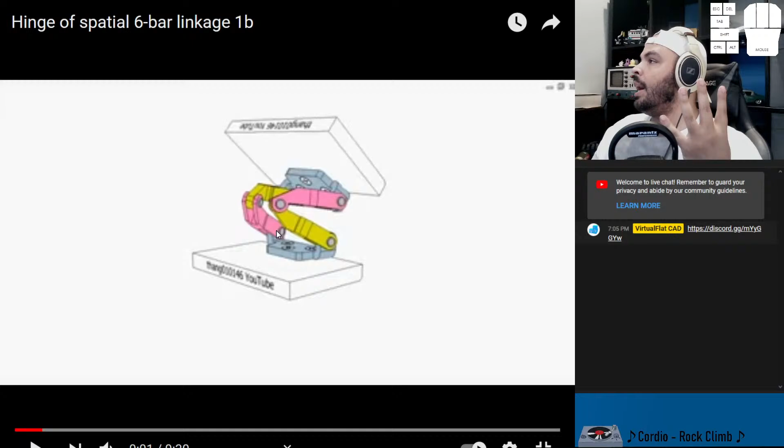Well, you have to consider a link as any connection between 2 hinges, right? So the ground links count. So from the end of the pink to the end of the yellow, that's 5. And then the same on the other side. The end of the pink to the end of the yellow, that's 6. I don't have 6 fingers, but there you go, 6. So it's a 6-link mechanism.

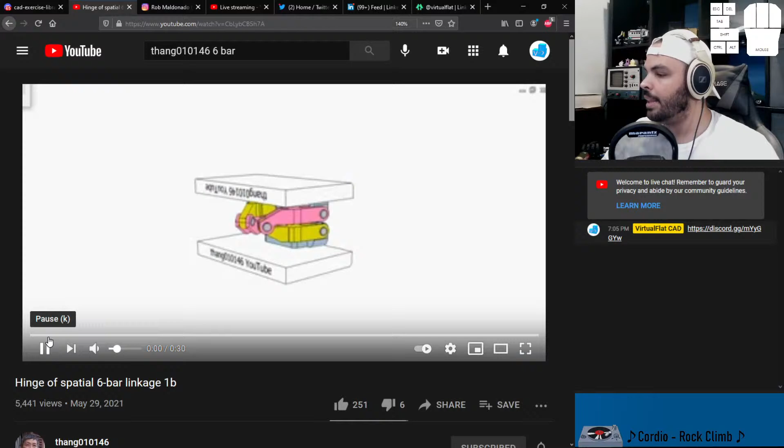And it's just like a hinge. But instead of being a simple hinge, something like this is very useful because it provides extra clearance when going through its rotation. So you could see something like this where you need the door of something to be flush when it's closed, but when it opens, it needs to get out of the way of the stuff around it. So something like a car hood. I'm not saying that a car hood uses this exact same one, but yeah, I think it's gonna be very fun.

So let's analyze this a little bit, shall we? So looking a little closer here, I have these brackets. They appear to be trapezoidal shape, and they have their hinges at diverging angles like that, with the angles going away or outside from the actual hinge portion of it. So I can produce one of those.

Additionally, it would seem that the difference between the yellow and the pink is that the pink has 2 female connections. You see that? 2 female connections. The yellow has a male and a female. So that's what allows the bracket to have both male connections, but a male needs to go with a female in the center there for it to actually work. So that's how that works out. There's also some pins, but those are arbitrary. I could put them in, I could not.

And Melektrika just showed up, which is amazing. Always awesome to see her here. She tends to pop in my streams every now and again, and I appreciate when she does that. But yeah, it's pretty good to be here and be streaming for you. It'll be good, and I really can't wait to start working on the improvements and stuff like that. But like I said, I need to figure out some stuff based on what I've learned.

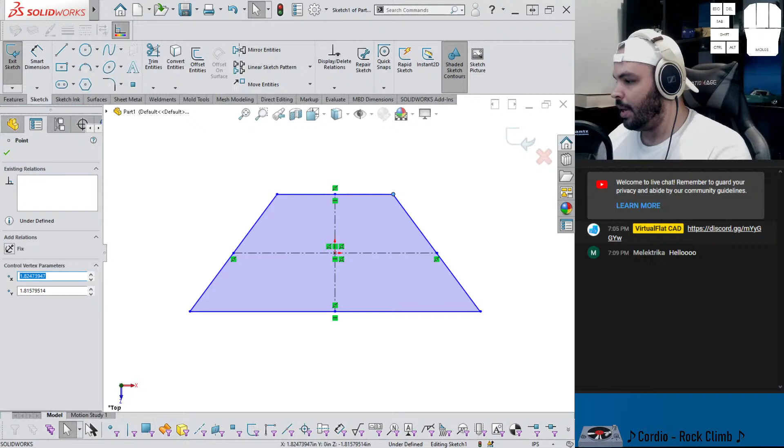So let me get one of these. This is a center rectangle, but if I delete the verticals - yeah, there we go. That's a quick trapezoid shape, just in case you want to do that. And yeah, let me do it like this.

Okay, so the overall width of this thing, let's make that 2. The average length, maybe 4. And maybe an angle would be most appropriate here, say like 30 degrees. And just out of curiosity, we can get some driven dimensions - there we go. So it's about 5 and a little less than 3. But yeah, that looks pretty good.

We're gonna go for our sheet metal base flange, and on the video it looks kind of thick. Yeah, that's like plate at that point. It might be better to just machine a shape like that, but if you wanted it to look like it, maybe you can set it to steel and go for like 3 gauge. That's exactly what I was thinking. It's heading towards the downward direction, so maybe I'll reverse direction for the thickness, so that the top plane is where it will sit on, and I think that's pretty good.

To get the corners, I could say corner trim. I want this to be fillets, and maybe 1/2 inch like that. There you go. You might be looking at this and thinking you could have just extruded that, but with an extrusion, you can't do this. Ooh, check that out.

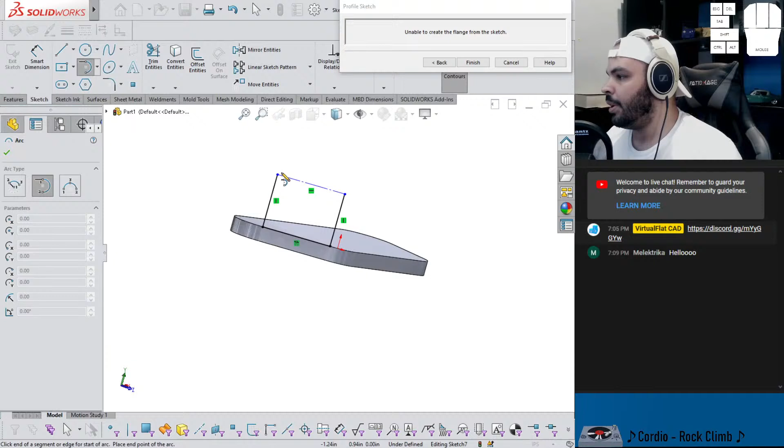So what I'm gonna do at this point, let's do edit flange profile. I'm gonna turn that into construction and get a tangent arc, and I should be able to bridge this to that. Just out of curiosity, what radius does that give us? It's kind of a weird one, so let me rip that off. And I'd like the midpoint of this to match up with the midpoint of this - make coincident - and then I can turn this into a more normal value that is centered about that edge there. There you go, and we can say 0.5.

And let me make the bend towards the outside, so I'll say finish. Oops. Let's do something like that. I think that's what he's got going on there, right? So let's tab over and take a look. Yeah, it's directly towards the outside, it would seem.

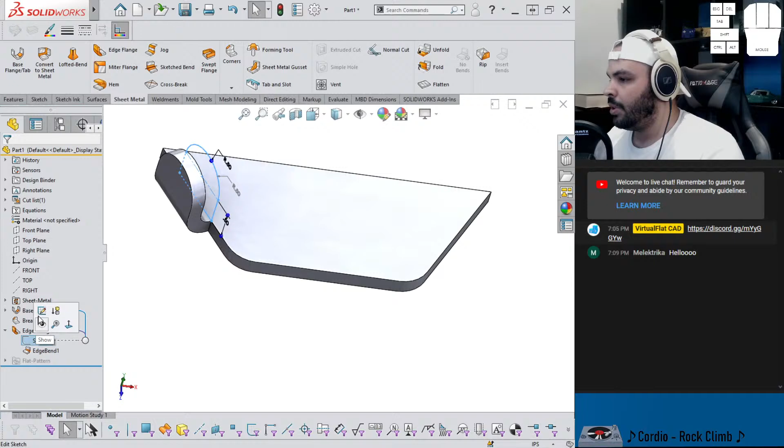I do notice that the flange is right towards the edge, so maybe what I'll do... yeah, the preview display of these look weird. I wonder if that's a bug or something. But let's say I just want the 2 edges - this and this. And then let's adjust the sketch here, which you can do just like this - just remove the midpoint relation and say that this will hang out there. Okay, that does seem to work out pretty well.

Oh, I forgot about simple hole - that's something that never gets used. Let's go for hole wizard instead. Let's go positions. Something like that, maybe, and let's go for like 3/8 or something - 0.375 - like that. And then I can say that it is mirrored about that plane.

And that's basically the bracket. So let's go into here - bracket.

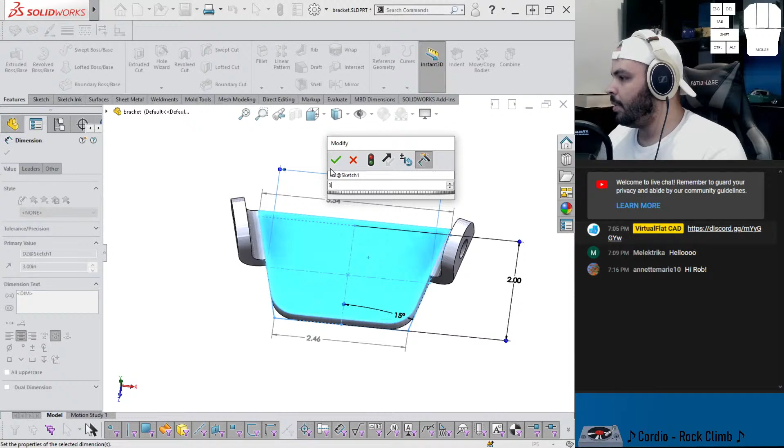Hey, Annette just showed up - I'm glad to have you here. And at the very same time, Workshop 1668 - hi all, he says. Hey, I saw your work on Instagram, dude, that's some slick welding skills you got.

So, let me do an assembly. Oh.

New assembly. Let's put this down just like that. And I know we'll need a copy of this. And it needs to be opposed. So eventually, when we start putting this together, we'll have something like that.

Let's look at the picture again. So funnily enough, let me see here. Is there any handedness to this? Yeah, between the two parts, the pink and the yellow, it does appear to be handed.

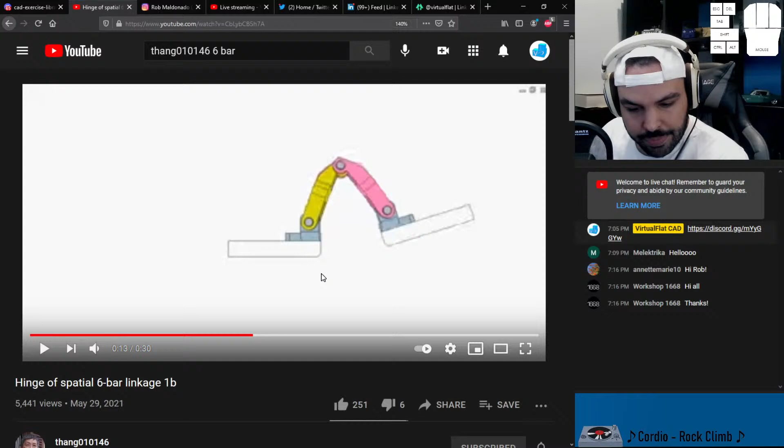So I think the way we can do this, let me see if we can get a better view of it maybe later on. So that's it in profile there. That's pretty good. And how about from over here? So it does tend inward.

So what I'm thinking of doing, let's draw it as seen from the viewer being on the right hand, looking towards the left. You'd look straight onto this, and I would expect to see a shape like that. Like there'd be a crook in it.

And based off of that, we can put more details, because that's just to fill it. You've got to take out all the details in your mind and just start with the basics. So it's just a crook with either a cutout or a tab based on whether it's male or female. That's really all it is.

So all right, let's try something here. What's the thickness of this again? This is 3 gauge thickness.

Don't know if I'm messing myself up in that regard. Well, if anything, I could do a top-down assembly feature. So let's do a part, maybe on the top plane.

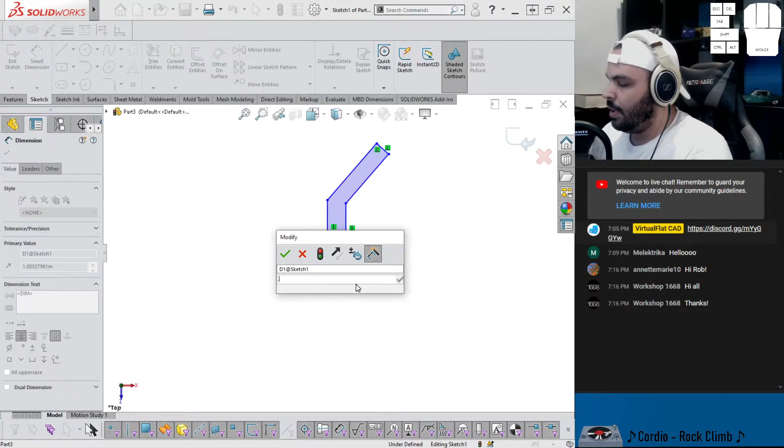I think fundamentally the shape is just kind of like that. So let's make this 1/2 inch. Maybe make those in line with each other like that. It's not hooked to the origin properly, so let's do something like that.

And now let's define the angle here. So let's do 180 minus 15, which is the same angle we had from the other one. I think that'll be very relevant. And I guess overall length, honestly, maybe from that midpoint down.

Think what would help us if we did something like that, made these equal. And then I'll maybe increase this to 3. We're probably going to have to play around with the design a little bit. Link.

Yeah, this could take on a thickness. Maybe like 1 - that might be too much. 0.75. Okay.

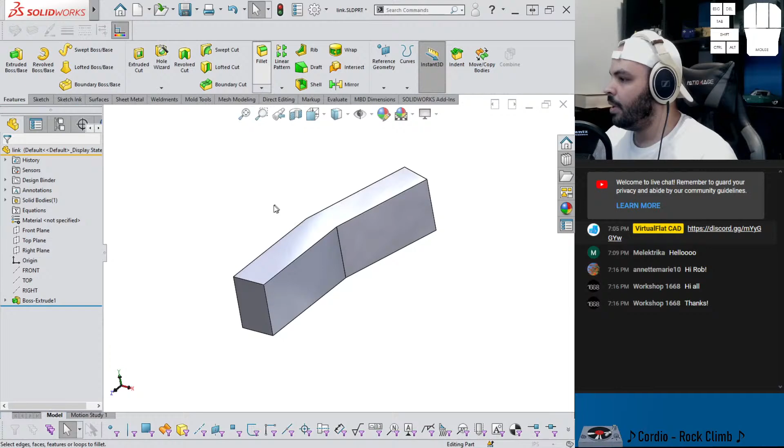Let's do some full round fillets here because we know this is eventually going to be a hinge, and rinse and repeat on the other side. So we got something that looks like this now.

Let's do another sketch. So this is the both female version, which looks like what this is tending to. Let's go to a rectangle, select midpoint, and get it centered about just like that. And this has to be the 3 gauge thickness, but I'm going to put 1/4 of an inch like that.

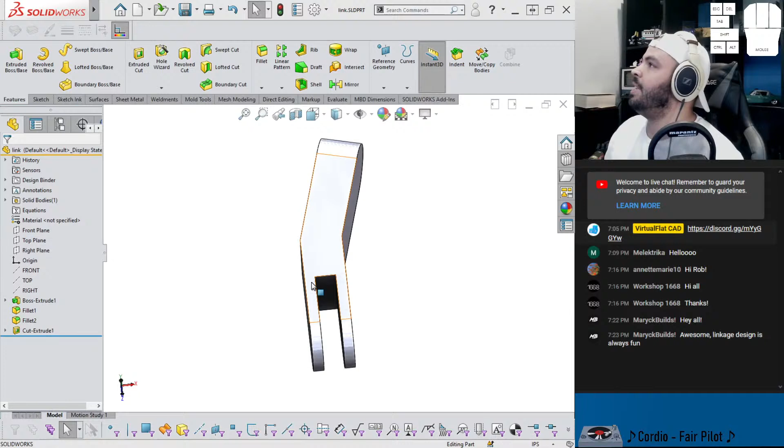I just noticed the song hasn't progressed. I know it was on repeat. I'm sure you must have really liked that song a lot because it was just repeating over and over again. Yeah, these are the kinds of glitches I'm seeking to resolve in the future when I want to redesign some elements of my stream to make it look less kludgy and more pro, you know what I mean? And then investigate streaming to also Twitch at the same time. I think it'll be great.

All right, so here's something fun. What happens if I take this, select sketch 2, select the top plane, and go insert derived sketch? Woohoo. It's almost like copying and pasting, except - actually, let me get this midpoint. Oh god, come on, give me the midpoint. Or I guess we could just do this. There you go. And then you see it's like a rigid shape.

Oops. I could say that is parallel. So notice it's fully defined without any dimension. That's because derived sketch will always look at the original sketch and copy whatever it's doing, and then place it according to the 2 relations that I put. So that means if I change this one, it will automatically change too, making our lives easier, because I'll assume my design intent is that I want them the same.

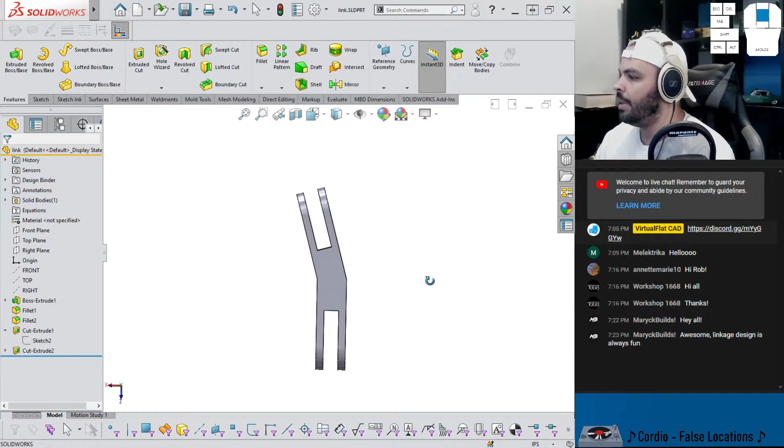So we get something like that. Let's give that a good old save. And I guess there's no particular handedness now that I think of it. You just flip it the other way, since it's somewhat symmetrical. So I might be able to take that to my advantage. I might be able to do an indent to adjust. Or this has got me thinking, huh?

Well, let's just leave it like this for now. Actually, if I want this to change from male to female, I could easily do that with another feature. Let's make this configuration.

So let's rename this. This is female.

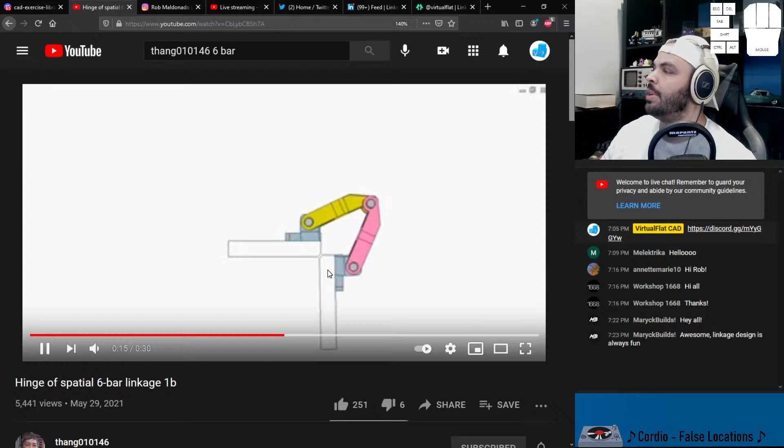Oh, by the way, I'll show you what I'm going for - it's another thang video. Start it from here, so it's just a hinge that starts from a collapsed position and has this kind of wide throw when it opens. Very useful if there's something in the way at the hinge area - the hinge just goes around it and then it's able to meet. I think it's very, very cool.

Yeah, so let's make a new configuration. This is male, femal, or female, because I don't know how to spell. Let's not overthink this.

Let's just sketch on this and say, yeah, let's just convert, extrude up to surface, don't merge. I'm sure there's better ways of doing this, by the way, but we'll keep it simple.

I do like to overthink things a lot. We'll take the same thing, extrude cut through all both, should destroy the two tabs, but then we have this left over. I'm just going to do a combine.

So the idea being, we can put this in a folder, male. So when that's unsuppressed, you get a male. You suppress it, you get a female, which is perfect because we can toggle that through configure feature - they should be suppressed in the female, but unsuppressed in the male.

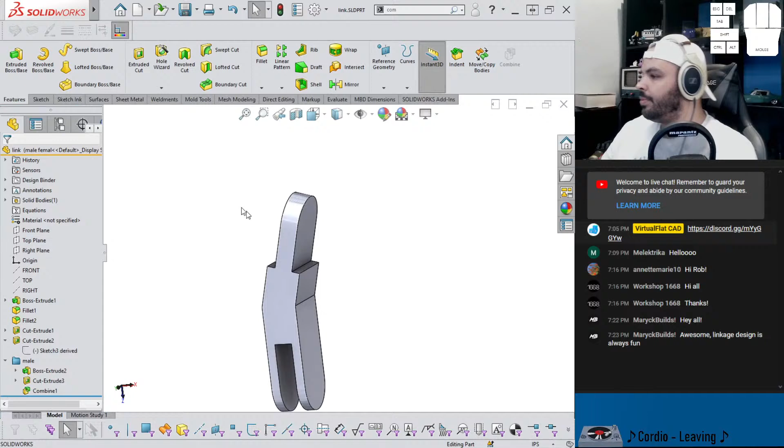Alright, so that is looking pretty plain right now. I could add some more details, but I do want to test functionality, and I can do that right now.

So let's do a link, and I want this to be, at least for right now, a female. Yes, there we go.

And should use the hinge mate. So advanced mate, hinge, or mechanical hinge, concentric - I can use these, and then coincident, maybe that on that. There we go, like that.

And let's copy this over. Needs to turn around and turn into the other variant. And let's do another hinge.

Yeah, ever since Yaya mentioned, you know, what is hinge? And I tried it out, like, I just can't get enough of it. It's great.

Alright, so we need another male. And actually, let me get another female in here. There we go.

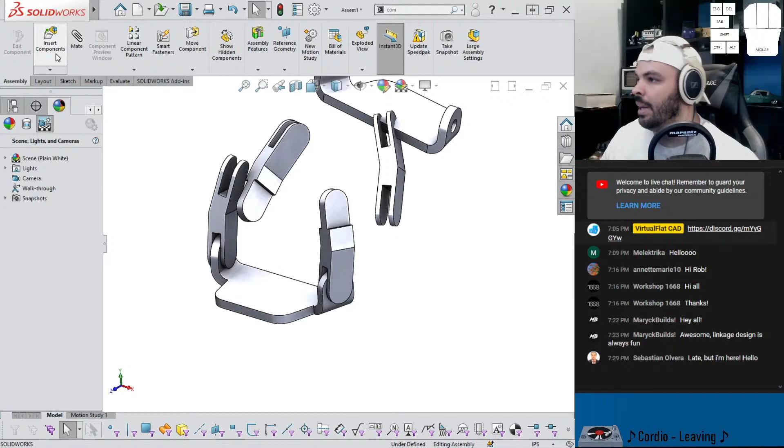And now let me boot up mate. Late but here, says Sebastian. Oh, I'm glad you're here, dude. I really appreciate you hanging out with me while I do this. Yeah, Yahya is missing. I do know he's a student though, so that could be part of it.

And let's do, nope, this to that. Oh, we get hinge. So we got that to that, coincident, that to that.

Get some more hinges. Concentric this and that, this to that. It's going to be an assembly entirely of hinge mates, so I wonder how this is going to go. It snaps right into there.

Oh wow, that is cool, but that's not exactly what he has going on there. So let's see, let's try and see what's wrong here.

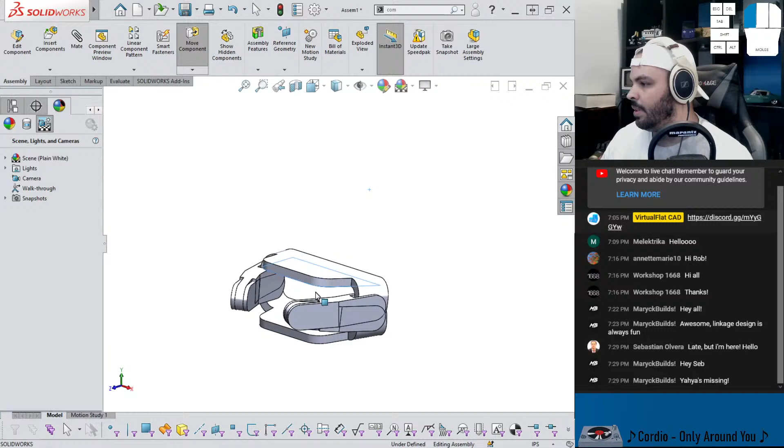Oh, I think the other end needs to jut out a little bit now that I remember. If I look here, yeah, the hinge juts out, because otherwise - oh yeah, look at that. Very interesting.

Yeah, it's kind of hard to see the detail in here, but this is conquerable, we can do this. So let's go back here. I need the hinge to like...

Oh, I think that's gonna make this super-handed, actually. Well, I say super-handed like it's a term. It's not.

So I think I should honestly just extrude a tab. You know, something like this.

And maybe you can make this the same radial - not co-radial, equal is what I meant - like that. And then how much does it jut out? Good question, I don't know. We're gonna put a value and test it. 0.5, so that leaves it right there.

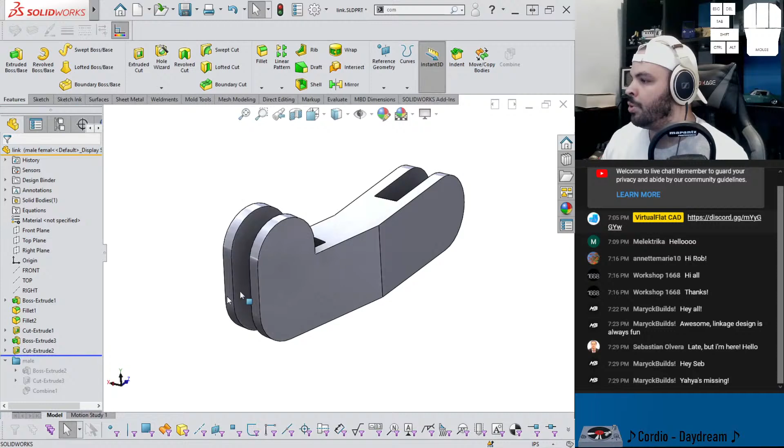Like that, so the cut extrude should be still fine, like that. And then for the male variant, actually updated beautifully. That's incredible.

Alright, so let's try this. It's gonna be a bit of a mess, that's okay, we'll take care of it. Hinge, we're interested in, for example, this one. So instead of this being here, let's do this to that.

Let me think here. I think they're naturally female versions. Look, only the male's updated, so I need to do that. So I need to test a female, which does not have this. I just need to unsuppress that. There you go.

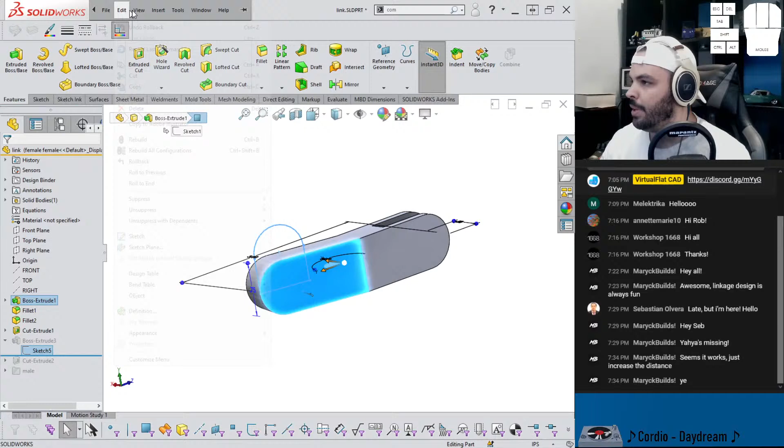Okay, I was afraid of this. It's facing the wrong way. But that's okay, so we're gonna resuppress this. Maybe I can just use this on the very same face, insert derive sketch.

Because we do want it to be the same, let me say that midpoint of that is coincident. Let's bring it around and say parallel, like that. And we'll extrude that to the other side. Because of through all both, this should work just fine. So we have female, and then male, female should go up the other way.

I think that's the only way this is going to work. Okay, so it's a little messy here. Let's edit, let's get rid of both of these, and want this and that. There you go. And then for hinge 4, let's get rid of both of these.

This and that. Yeah, and then now Maryck is absolutely correct. The only thing we're missing is we need to increase the distance. Oh, this is binding. Hello? Oh, I do need to change. Well, hang on, one moment.

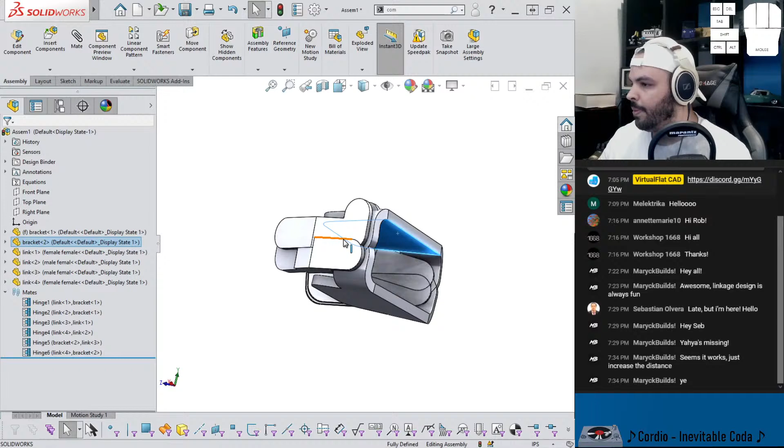Let me suppress this and this, I'm going to take that out. Okay, so this is now free. This should be free as well.

I don't know, let's just try this once more. Oh, I mated the wrong female end, that's what's going on.

Yeah, because the female end with the jut needs to mate up with this one. So I need to edit this, and let's just destroy both of these. I need that to go with this. Hello? Oh, these need to go as well with this. There we go, and I could say that and that. Alright.

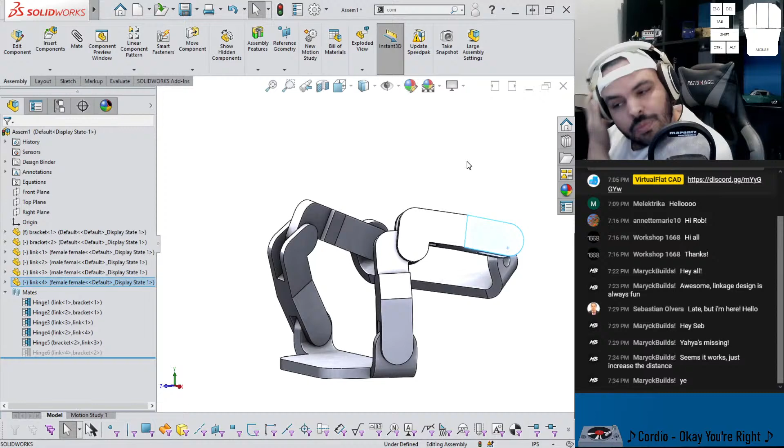How do you figure out the sizes that would work from Thangs video? You know, it's just really some guess and check, funnily enough.

But yeah, now, well, that looks close enough. I think it should be able to. Sorry, I'm thinking to myself. I just kind of try and intuit how the mechanism is fundamentally supposed to work. And from there, I just think of things like, oh, this part needs to clear this, or this needs to fit with that. I mean, you're watching, I didn't study anything before, I just looked at it, looked at the motion. I'm like, I think this will work. And you're seeing the whole thing evolve.

This is not what I want. Standard, I want parallel. And this and that. I'll leave that in. This.

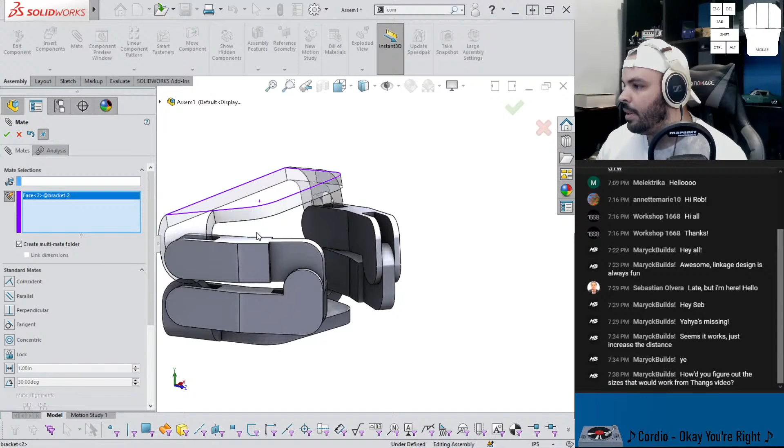So does that also? Oh, that's very peculiar. And this mate, I think one of the hinge mates is set up wrong. They have to be. Okay. Oh. You want to come back? So this hinge breaks, so why?

Here, let me just step through this one at a time. So can I get these two concentric? No. Did it add a coincidence instead of parallel? No, I can... oh, it might have.

And the point goes to Maryck, that is absolutely it. That was my fault. This is a perfect example of the error being between the chair and the keyboard. So let's try and activate hinge again. And sure enough, it works. Wow, you are the MVP, Maryck.

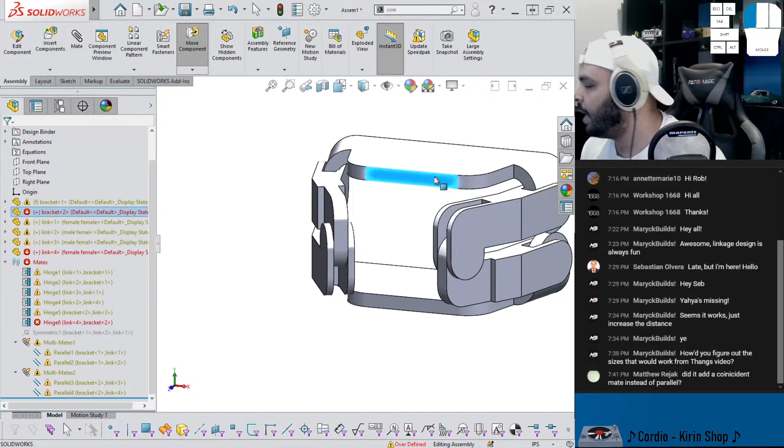And it's bound right now because these are active, so I just need to suppress these, which I was just using for testing purposes. But now, I said, and now it's not moving, but let me save.

Yeah, for some reason when I put all of this together now, it fully defines, which I'm not entirely sure why. There's also that thing here. That is peculiar.

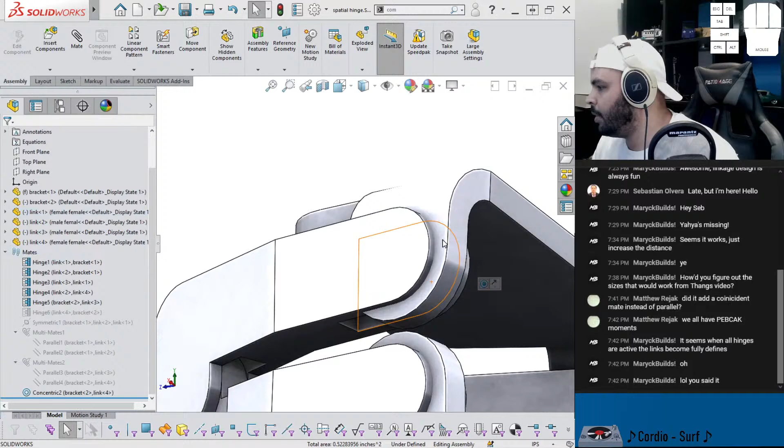So let me try just saying concentric for this. Now it's moving. Ooh. Something, oops. It's moving and it looks really cool.

But something's still not right here. It seems to max out. Oh no, you can bring it all the way out down here. Oh.

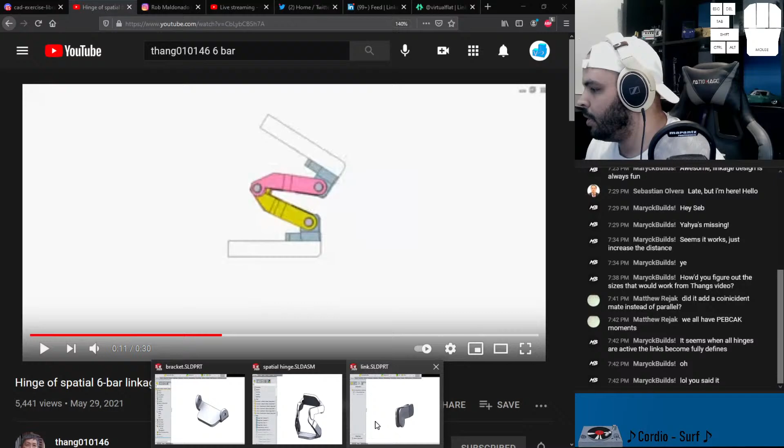Sorry, forgive me while I study this. Go back here. So what's the difference between this and this? Yeah, mine has a very weird character to it.

Here, let me snip. So other than the brackets on his being much larger than mine, it does seem the same right about now. So if I let it keep going... oh, this must be the links coming into play. So let's study this position here.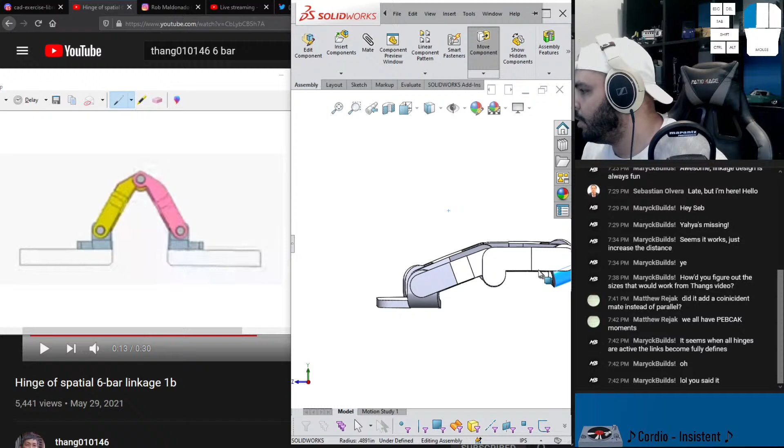So if I do this... Yeah, so by the time I do this, his is in an arch like this. You see that? Versus mine being basically almost flat.

So, what does this mean? It means I might have to change the length of these links, or possibly the angle that they sit at. Or maybe the overall width of the two linkages together.

But anyway, let me do something one of my friends showed me, which I think was pretty awesome. To set almost like a global variable that trickles down to parts. Let me see if I remember how to do this. I learned something very cool. I want these construction. So let's set this to 15, its current value.

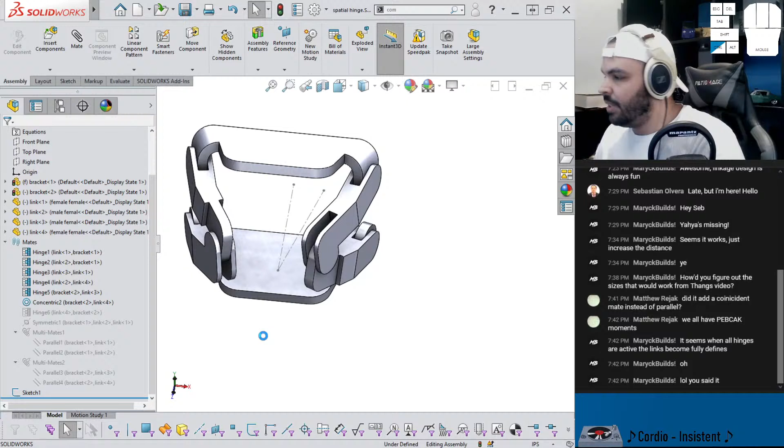So I have this sketch. So if I double click on this, I should be able to see this. I can say that this is equal to sketch 1, this 15. Ooh. Okay. And additionally, I should be able to double click on this. Ooh, okay, so I'm gonna have to set up a formula for this one actually.

So this equals 180 minus sketch 1, 15. Okay. Rebuild. So now I should have, well, I'll just say dimensions. I can just hide that away, but I can edit and say, let's do 30, rebuild.

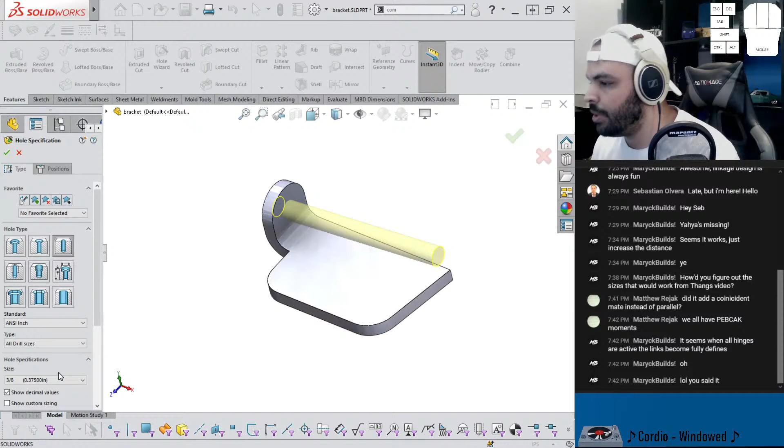Okay, some goofiness happened. But it seems to have the same defect, honestly. So what happens if I set that to be very slight? So I'll put 5 degrees instead. Something happened here. Hello? Oh, they actually intersect with each other. This needs to be set to up to next. Yeah, that's what's happening.

Why are you still alive? Oops. Very strange, because now it doesn't even want to open. What are these? What is this? That is so strange. Where is it copying from, that it looks like that?

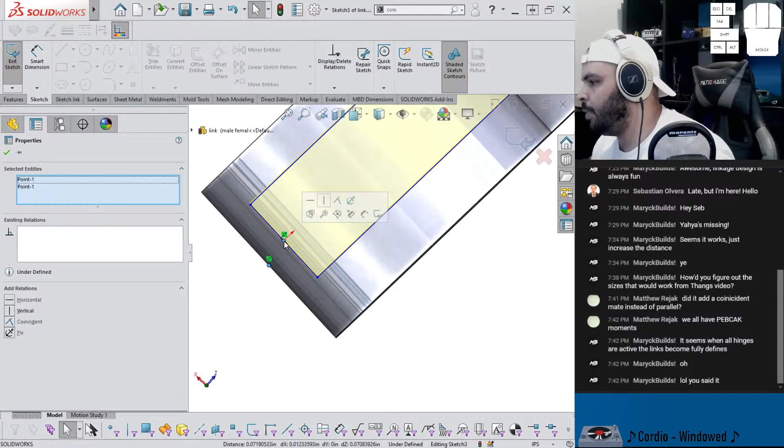So the question is, why does this not update correctly? Oh, it's straight up not defined, but I thought I did it. Midpoint. Midpoint. I think I did this one with a midpoint relation, so I don't know if this is going to make any difference. So this is acting pretty strange now. Put it back to 15.

I don't know why this same defect is happening. This is really annoying. That's a bug, I assume. Yeah, it's underdefined again. That is very annoying. So let me flat tree. I have to do some surgery on this. Oh, rip. Yeah, I'm just gonna have to redo that. Just do it the old-fashioned way.

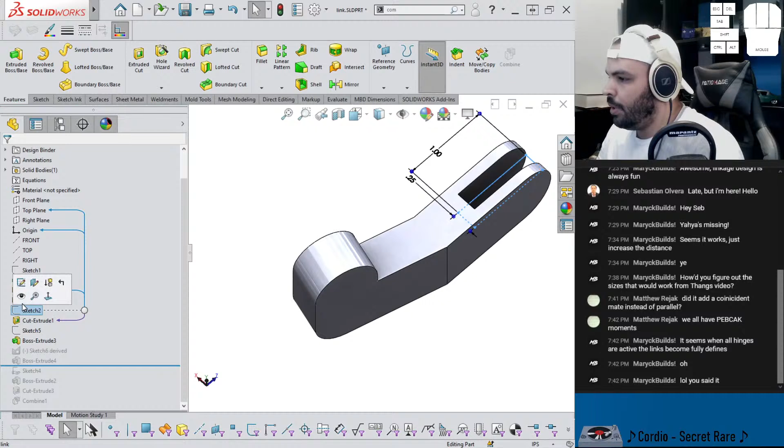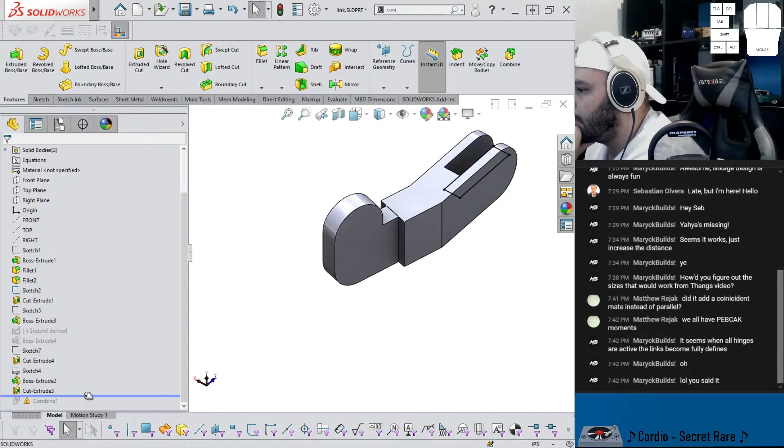Put that back. Boss extrude 3 for some reason fails. Because this is different, isn't it? There we go. The other configuration is bad, I think. Yeah. It's because this needs to be unsuppressed, so is this. Oops. Get out of here.

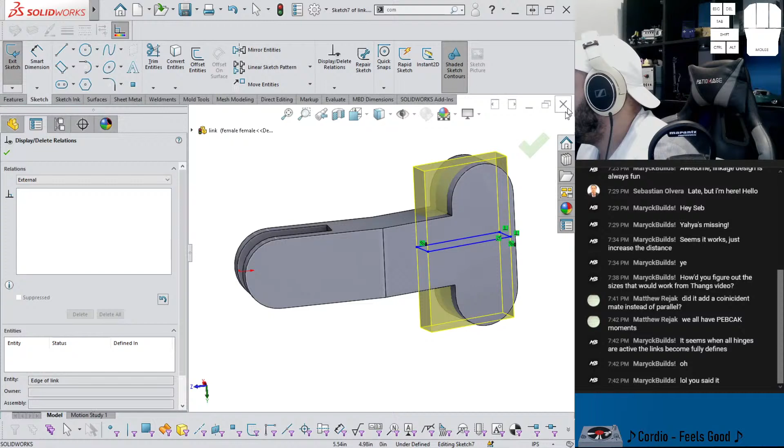Man, this is getting really goofy. Let's do open part in position. This one needs to go away, needs to suppress. So this has a parent relationship to this that should not exist. Probably through the sketch. So what I'll do is display external, delete all. It's going to be undefined, but just for a moment. So let's check it. Let me see if that works.

You gotta get it eventually. So it's that. Honestly, what I might do instead, let me see if we can get a point right there. And say that the point needs to move out. Coincident. Okay. And I should be safe in saying that it should be parallel to that. Okay. Better.

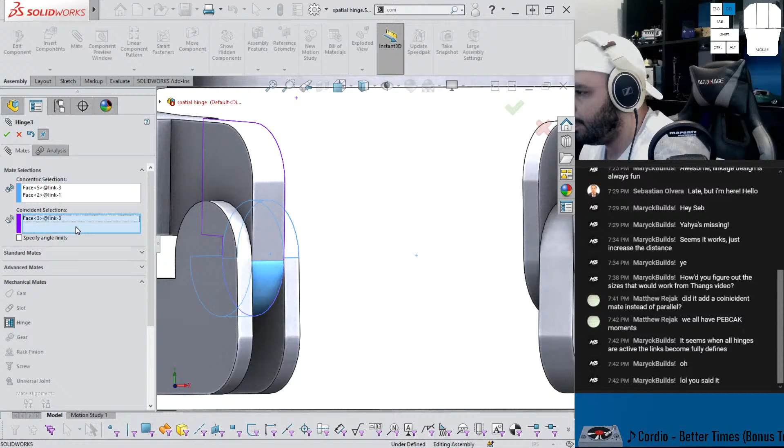And then there is a matter of this. Oops. Let's see if replace works. So it didn't, it would seem. Oh, it worked for one. So that with that. So one thing I do want to try is, what is the effect of just making this link straight up longer? What happens? So that's driven through this. So if I make that 5, rebuild, something really bad happened.

Okay. Okay. So when does it go cuckoo for Cocoa Puffs is what I want to know. Okay, that's normal. Okay, all of that's suppressed. And this is the male female, so far so good. Okay, why? What is that? Did the location of the point not update? Oh, that is really bad. Why is it like that?

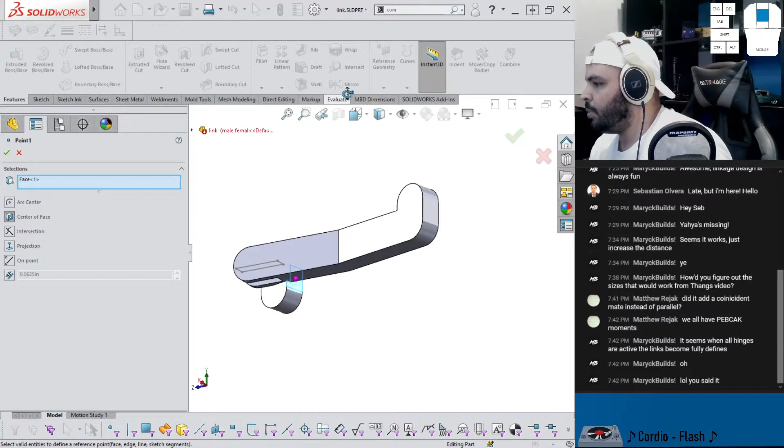So why is this here? There's so much to say. I can't find words. So let me just say that this and the part origin should be coincident.

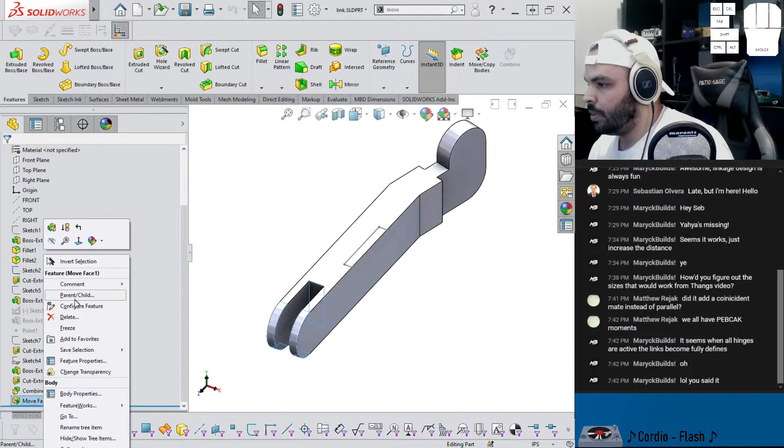Yeah, I really messed this up. I think moving that point was just not the right play. I mean, what it could do, just like the barbaric way, move face. Like that. Though, I wonder if the lopsidedness will do anything. Oh. Configure. So the length also seems to have no effect because you see it just goes flat. This is very confusing. This is very interesting though.

So what is it about Thang's version? Oh, it shows the angle. The axes are... Ooh. The axes of the two revolution joints on each bar are not parallel to each other. Is B equals 20? Oh, I think that's what he's saying. It's not parallel. So we already considered that. The axes of the two revolution joints are not parallel to each other. Angle between their axes is A equals 20 degrees. So he's saying, where I have 15 right now, he has 20 in here.

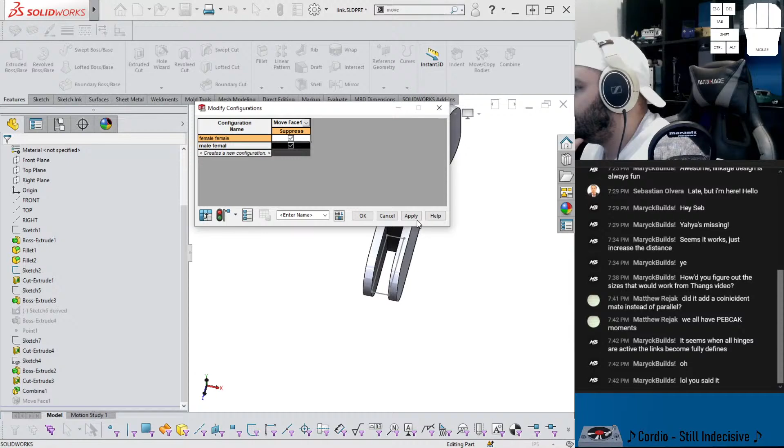I mean, we can... Oh my gosh, why? I created a monster. Configure. I need suppress in both of them. So 20. Model isn't updating very well.

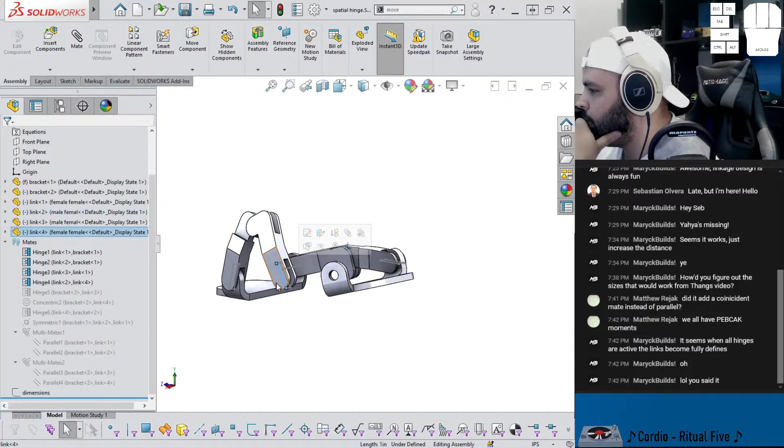So let me see something. If I suppress both of these, and if I do like what it's supposed to be looking like, and I say, for right now, let's put coincident, and this time I actually do mean coincident. Yeah, that doesn't look like that will fit in there, and I think herein lies the issue.

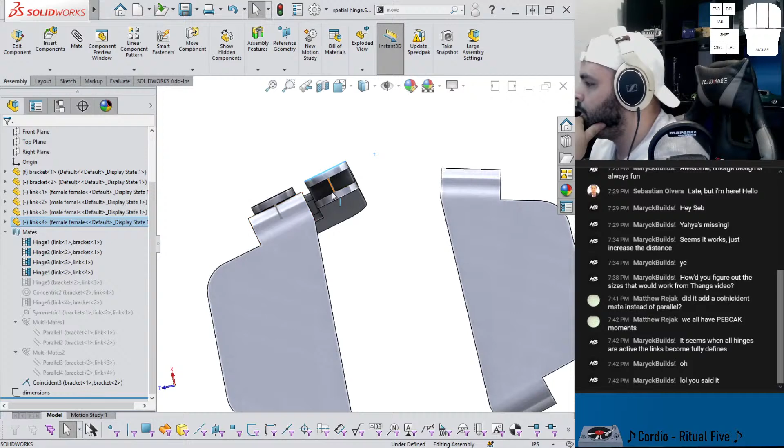So, if I look at the hinge from right here, this is in line. But oops. Come on, dude. But as it extends outward, is that what he means by the axes of the two revolution joints on each bar are not parallel to each other? Oh my gosh, so annoying. So what if I cut and twist this? Okay, so both of these are still functional.

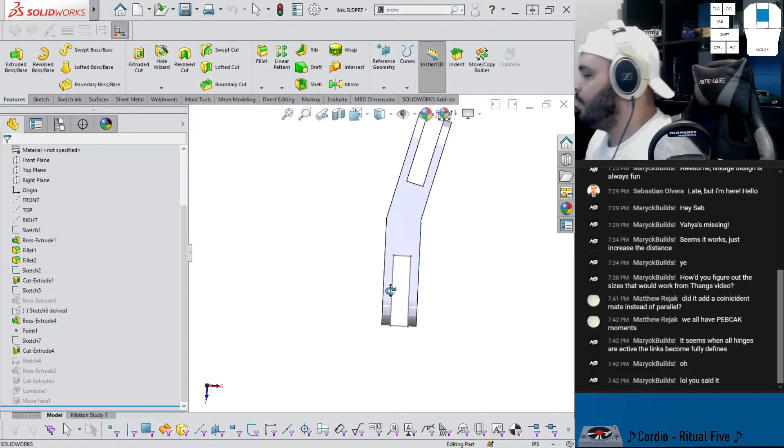Go back here. Sketch a line. And I'll just leave it like that. And I'll just give each configuration their own separate features. So let's split using that line. We want to keep both. And then move. Oh, not that. Yeah, it's got to be the front and then that.

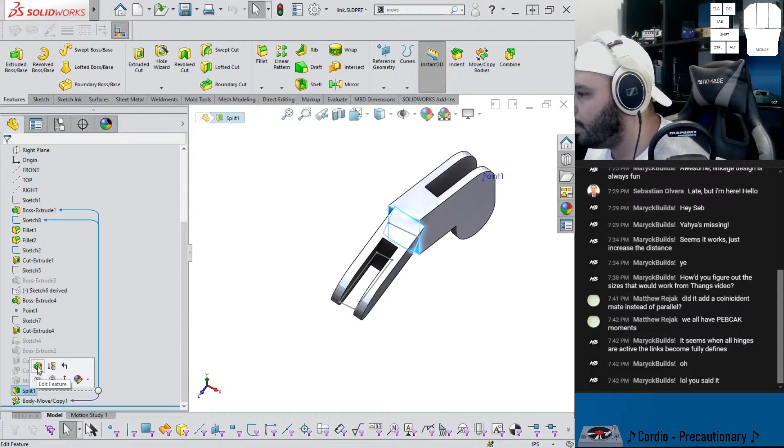If I move this like 15 degrees one way. Yeah, I know it doesn't look very good, but I just want to test out mechanics. So we got male, female, which is just fine. I'm just gonna rinse and repeat instead of try and get this to work out. Hold on. So sketch 8. Is it suppressed right now? Oh yeah, it is. Right here.

Let's keep both. Move this. And I have a hunch I might have to move it the other way. So how does this work? So we have this and that. I think we're getting somewhere. I think the twist is too much though, because if both of these are 15, just like this, that means in order for this to mate up, it needs to be like that.

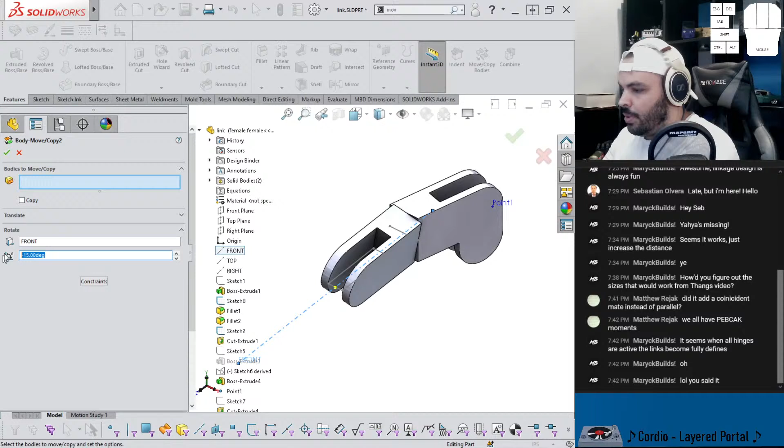So let me reduce each of these to 10. 10. This to minus 10. Come on, dude. Oops. Oh. Yeah, let me switch the config and then do it. Minus 10. Wow, that looks a lot closer. So let me turn on this hinge and then this concentric. Oh, but I need to take out this coincident. There we go.

Ooh. I think that's the hot ticket. My links are very goofy. Oh, that is so cool, though. Wow, look at that. I just needed to twist them a little bit. Alright, so now we have it functional. The next question is, how do we make it not look bad? So, I think this could just straight up be larger. I don't know, that's way too large.

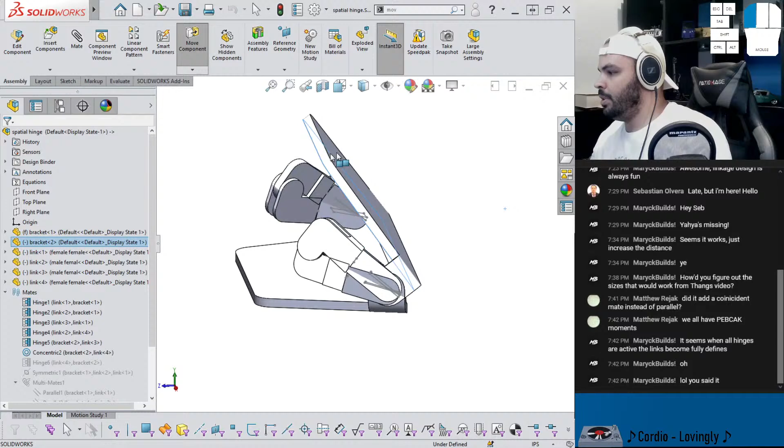So interestingly, it doesn't get parallel until it passes through itself like that. This also behaves a lot better, by the way. Like, it doesn't fight with me as much. I might have to make these taller, the bracket. No, it still crosses through itself like that.

It would be great if there's a CSWA for mechanisms. Yeah, I agree with that, actually.

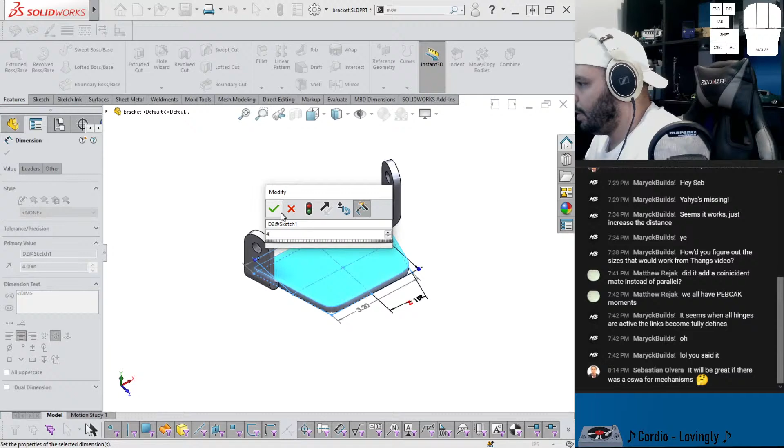It's not related. I'm gonna make this smaller. So again, I think the thing that I was changing doesn't really affect anything. So the height of this appears to have no implications for its character and behavior.

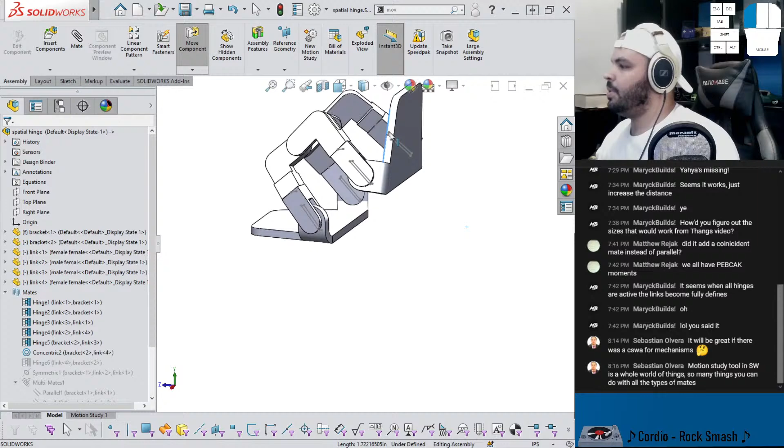What if I go back and I make this taller like that. Okay, so that worked well. What about this. Okay. So I just straight up made that thing taller. So, same issue still. I mean, it works in this range pretty well. It just doesn't collapse on itself.

All right, so let's again compare. So this is fundamentally the same thing, even though mine looks like an L. You know, you need to focus on where the hinge is. So the hinge from being right here going to right here makes that. Oops. Let's go back here.

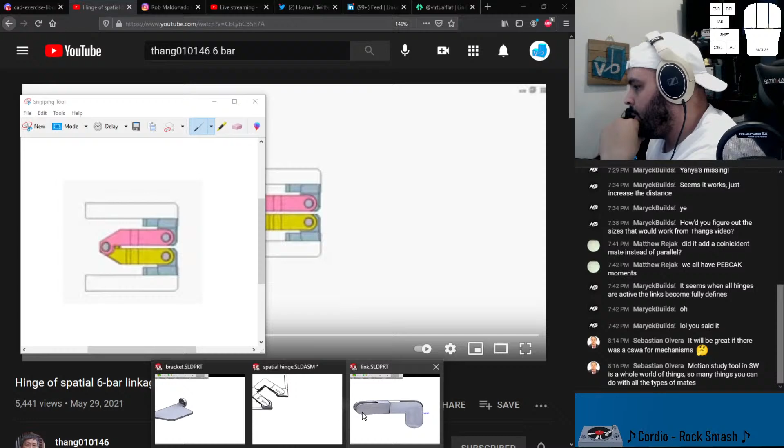So for it to collapse like that and sandwich up like that, you know what I'll do also, let me pack and go this. So if this goes really wrong, at least I can publish this as a model of the day, even though it's still not the same thing. It's still an interesting little doohickey, right? So we're gonna pack and go. So let's call it version 0, spatial linkage.

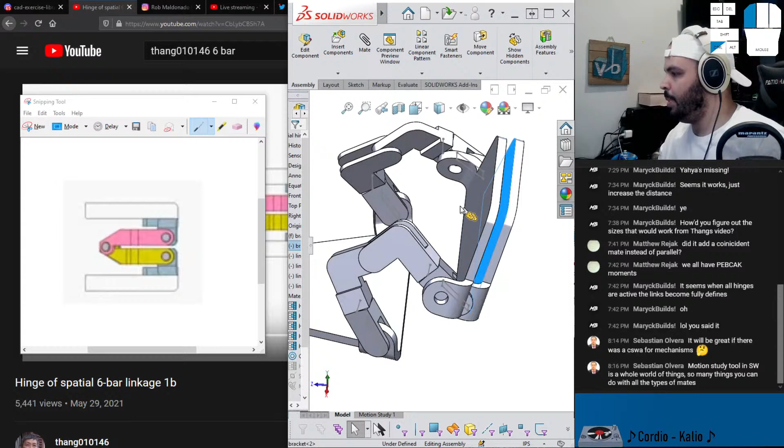So when this is on top of itself, whoops. This is on top of itself. What needs to happen? If you think about it, let's copy one of these just for demonstration purposes. So let's just get some arbitrary mates in here just to help out. There we go. So we would like for it to be here, which means by the time this gets to here, it needs to match up with this angle.

Something I'm interested to see, honestly. I don't know if this will make any difference. But what happens if I change the sense of the twist? Like I go here and then say that this is positive 10 degrees. And then change this, and then say that this is negative. What happens then? Hello? Let's get that out of there.

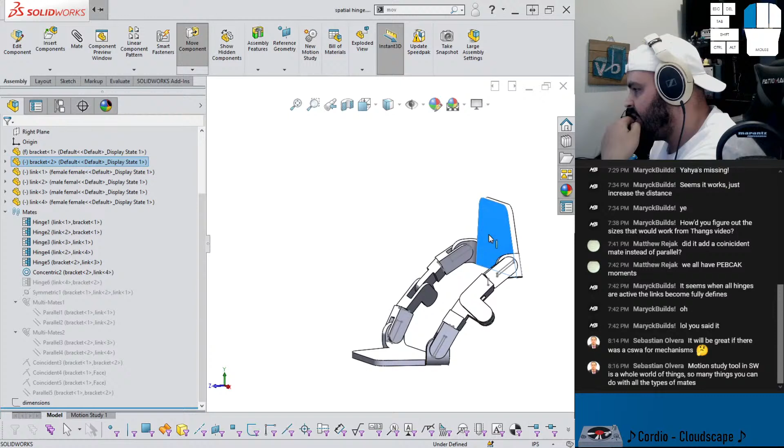Oops. Oops. -30. That's interesting. What the heck happened there? I was able to move it out and now it's... Oh, jeez. I invented something else. Honestly, it's like a pick and place mechanism. You know what? I might just go with this. Modify the design a little bit.

So what I mean is, imagine something's coming in on a conveyor on the left side. This thing could just be waiting like that, with a gripper of sorts. It comes here, gets stuck here, and then this thing can just move it. Either put it up on a shelf like this or just bring it to the other side and place it down.

I kind of like this better. I mean, if you guys have seen a mechanism like this somewhere, let me know, but as far as I know, this is accidentally original when it was trying to copy something. Well, let me actually make it look more of the part. So default, let's add another grip.

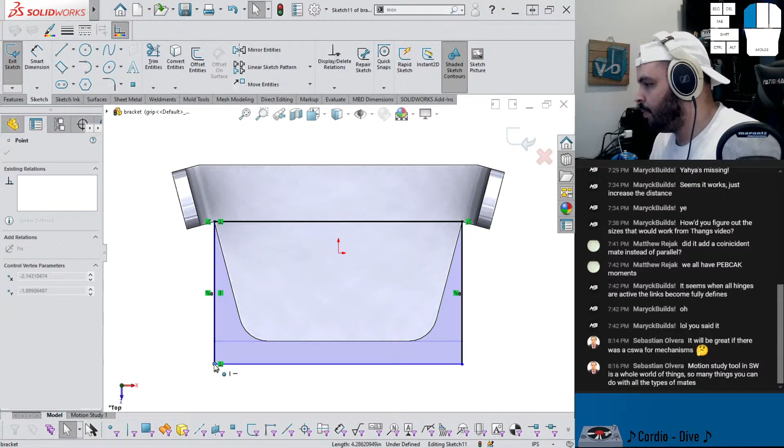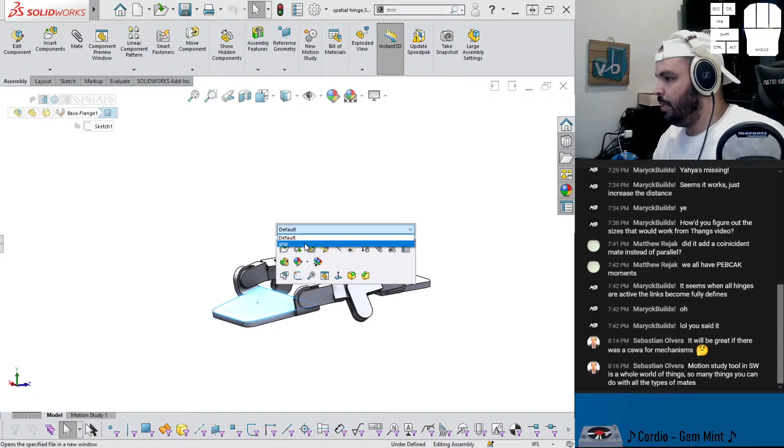Oh god, what is it doing? Oh. Do that. Let's see, I need a plane between this and that. Okay, this and this, please. There we go. There it is. Just make it very basic. Leave it like that. So I'll change this into grip. Oh, it broke. Sorry, I'm just staring at this thing. Okay, that's it, I promise.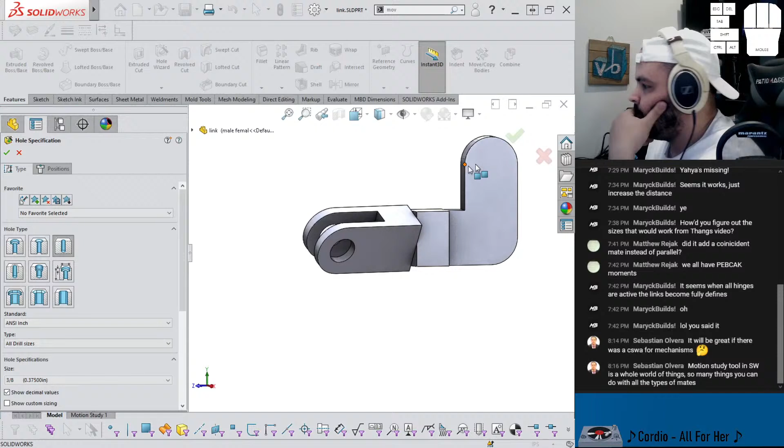I think the best way to proceed now is actually let me get some hole wizard holes. This has turned a little bit into a mess, but that's what makes it fun. I'm just gonna have to do one at a time. That's annoying. And let's just say through all. Need another one here. So that shouldn't affect anything here.

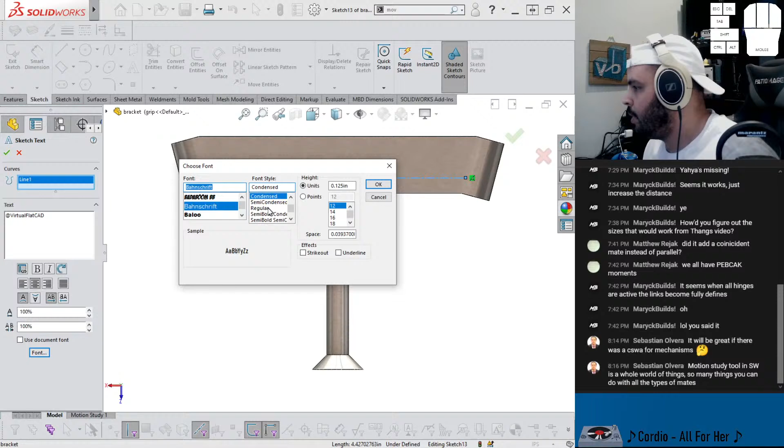Let me just make a couple of things metal. Let's do brushed steel. Can't go wrong. Because I can put my name on it, right? Okay, that needs to draw a line for it to inhabit. There we go. Curves. This one. Hooray. Mid. Let's go Bahnschrift. Condensed and maybe say 1375. Maybe regular. Or light regular. I like that.

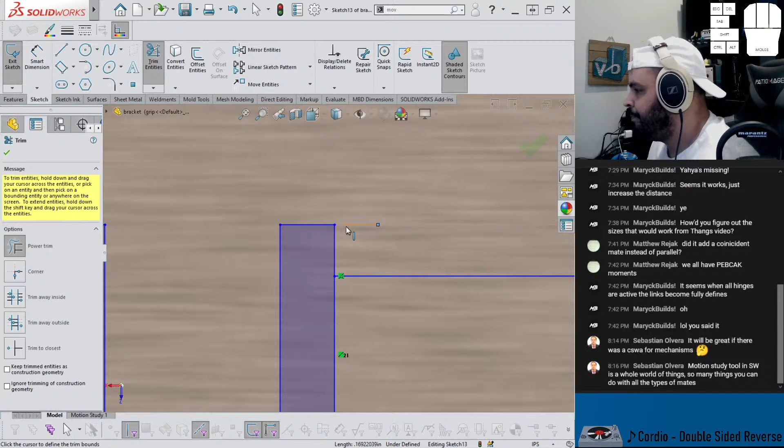Oh, that's annoying. Well, let me at least get it placed somewhat. It looks alright. Then I need to dissolve. Then trim. So that's fine. This is not fine. This is also not fine. That's not fine. I'm thinking something might be wrong with this if it's not shading. Yeah, we'll find out. Okay, L is fine. The F is not fine. Let's get rid of that, get rid of this. There. Now the D is going to be doing the same thing. I think I can cross through that and just say neat.

Okay, this is still concerning me. Let me say repair sketch. 2 points gap. Where? Show me. Bro. Oh. Okay, so let's trim. Whoops. 2. I don't know why it's not moving me there. I also have this to fix now. There. Let's not overthink it. I'm probably just going to fix all of these in place. Repair. 2 points gap. Let's see, can I move that anywhere?

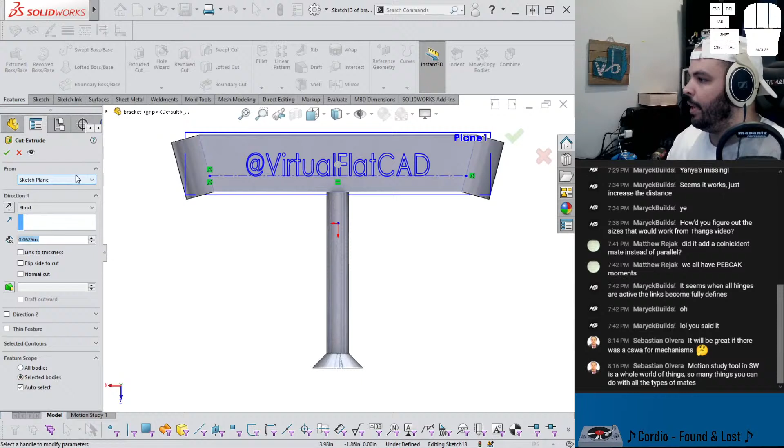This curves. I'm just going to leave it Century Gothic. Could even do something like that if I wanted to. There we go. Wow, that was hard. All right. So let me start it over here because I think it'll be pretty cool. We start way over here, right?

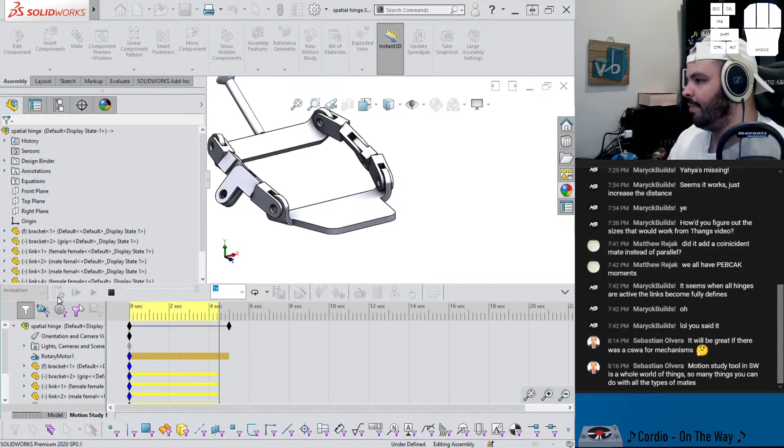And then let's just center it, maybe zoom in just a hair and go into motion study. I can get a rotary motor on here. I could say oscillating. Let's go 170 degrees. I don't think I'll have to go all the way, but we can test. Wow, that is way too fast. Let me bring this. It's like it's head banging. Let's do 0.2. Excuse me. I think it's pretty cool.

Alright, so let's not overthink this. Yeah, there is more stuff I want to kind of do, but you know, can't spend all the time.

Okay, so that looks good, but I need to change where the camera is. So that needs to be fully in frame. So I'll do replace. I might try and do. Oh, it's like locked. Go back here. It's like the same bug I was experiencing last time. Yep, it would seem. And then change this to 180.

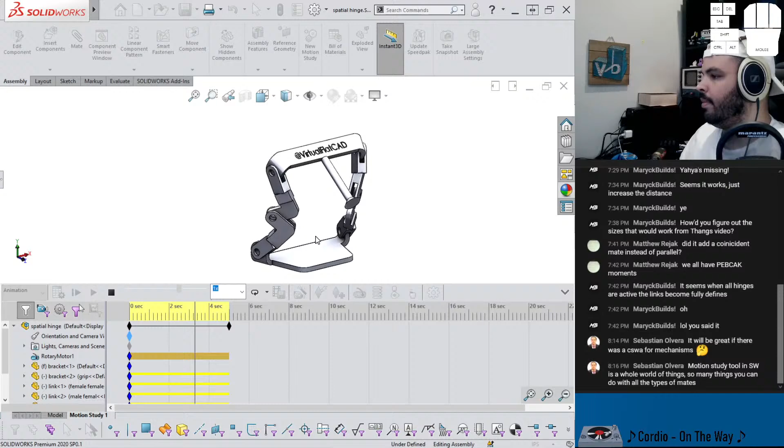Yeah, I don't know if this is going to be ever useful for anything, but it's mine, so I will enjoy it. So let's get this sucker saved out, and we'll call it a wrap. Okay, so save, 60, square format, MP4. So we'll wait for that to go, and we'll call that a stream if it looks good.

Let's see, how long have I been streaming? Almost 2 hours? Yep, I'd say that's pretty good.

Yeah, what's really cool is that it changes orientation.

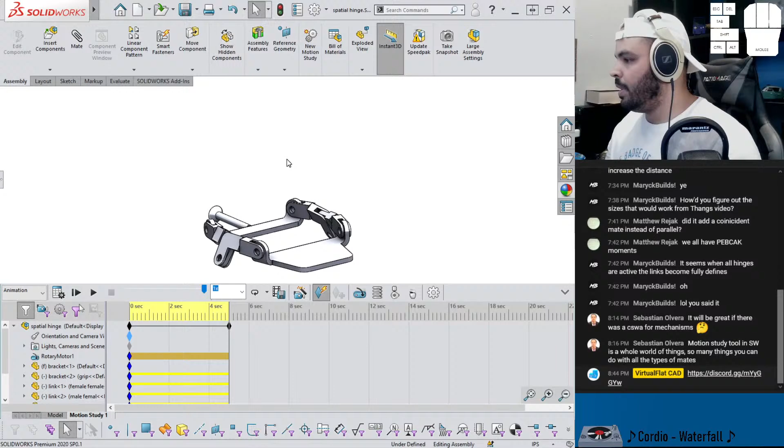So let's see how this came out in the end. Open with Windows Media Player. Oh, that is crispy. That is smoother than butter. Well, I really enjoy that, so I think we'll leave it like that.